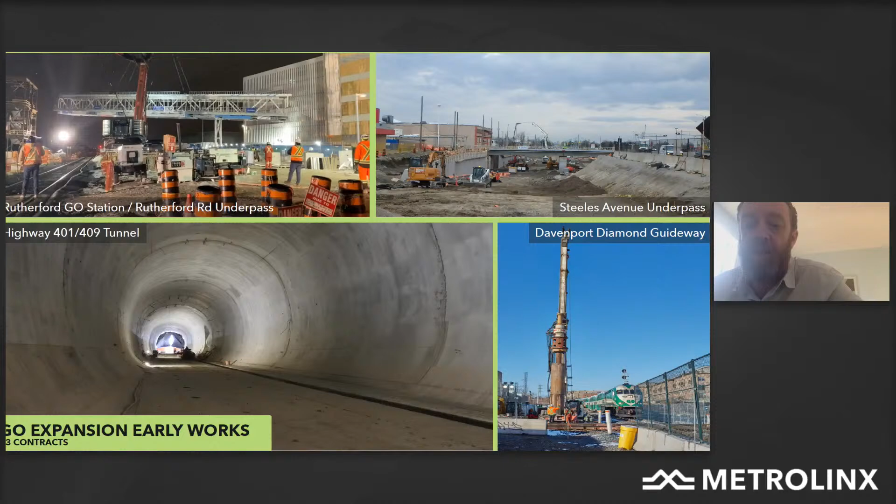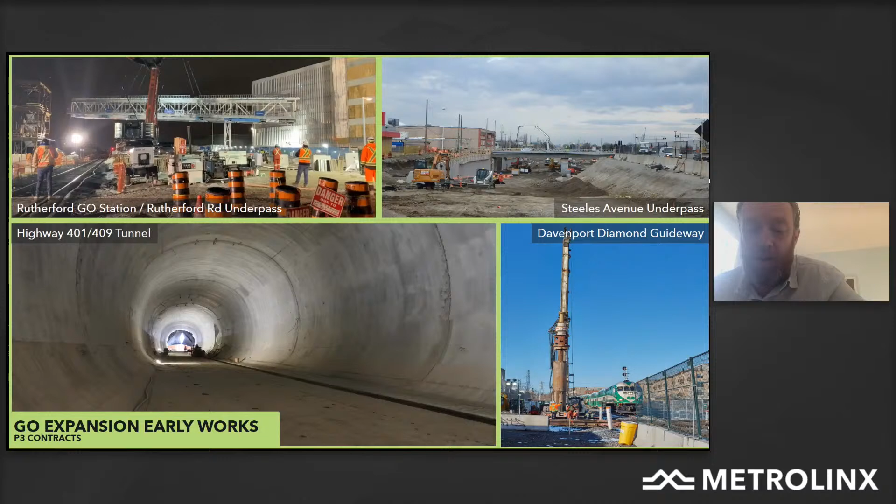Next slide shows progress on our GO expansion early work. So this is works to expand and improve the existing GO rail network. The pictures here are showing progress on our P3 contracts. In the top left, you can see a pedestrian bridge being lifted in February on the Rutherford GO station project. This project includes a grade separation, a new station building, car parking, a 6-storey multi-level parking structure, new platforms, new track, and reconstruction and reconfiguration of bus loops, parking lots, and drop-off areas.

Work's progressing very well on site, and this weekend there's a track shift which will be key to the progress of the project, under a road closure and track closure.

Top right, Steeles Avenue Underpass project, part of our Stouffville AFP. This work is to grade separate Steeles Avenue adjacent to Milliken Station. The train bridge is complete, and excavation under the bridge was complete in March this year. This is part of a larger P3 project that includes provision of a second track on the Stouffville corridor and work at Agincourt, Milliken and Unionville stations, enabling all-day two-way service on that line.

Bottom left, an incredibly exciting project as part of the P3 portfolio, the Highway 401-409 tunnel. Excavation under 21 lanes of traffic, a very complicated civil engineering project with minimal disruption allowed to the highway, and very tight monitoring in place from both ourselves and ministries and the highway agencies. Rail tunnel excavation was complete in January, tunnel lining on our first tunnel complete in March, and on our second tunnel we have waterproofing ongoing currently.

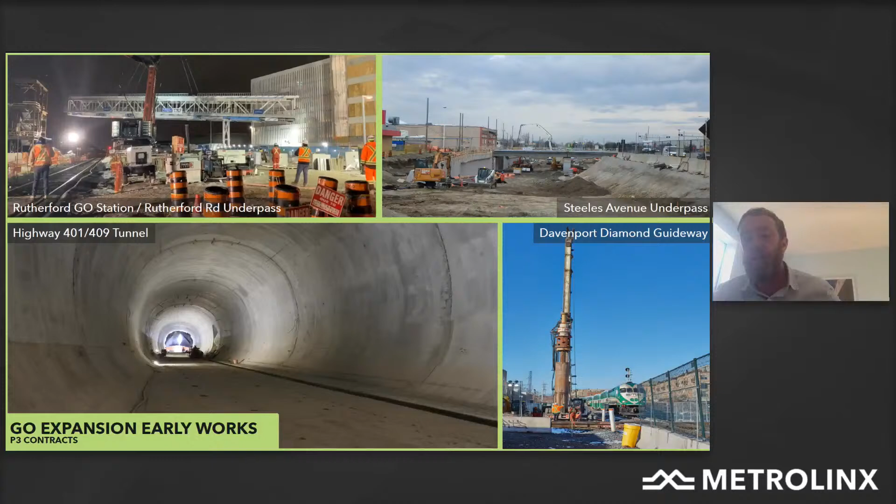Next slide. Again, on the Go Expansion side, this is more using our traditional contracts for the Go Expansion work.

In the top left, you can see a picture of our Stouffville corridor double tracking work that's been ongoing for a significant amount of time. This photograph shows work widening the track over the West Highland Creek, a very sensitive environmental piece of work, but it's progressing very well on that program now.

Top right, Bloomington Go Station, which was completed by the Capital Projects Group and handed over to operations on the 5th of March this year. It includes a new station, a new parking garage, and side platforms. A really significant piece of work for us to complete, and a real achievement for the team to have that complete in March and handed over to operations.

In the bottom left, we have Barrie Corridor expansion, enabling Project 1. This is an example of work - the picture you can see here is us installing noise walls along the Barrie Corridor. This is an example of where we've made use of the reduced ridership to really increase the volume of work we're delivering on the live rail network, pushing on very hard in the current environment of reduced ridership and reduced train traffic.

And in the bottom right, the last picture from a Go Expansion early works point of view, you can see Bramalea parking structure, a new parking garage to accommodate over 2,000 vehicles, an additional 1,300 spots, and part of a master plan on that site which has a new station building, improved facilities, new and upgraded pedestrian tunnels and accessible platforms. Works at Bramalea are significantly progressed now, as you can see from the picture of the parking garage coming together.

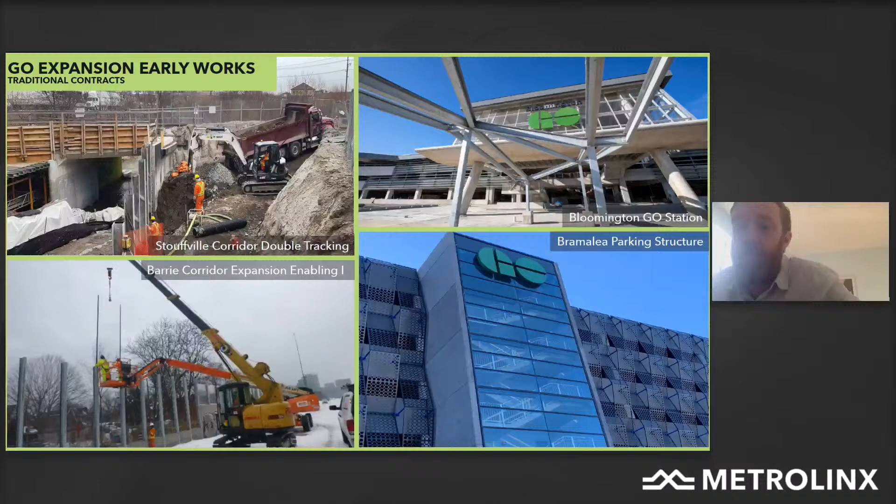And finally, subways - as Phil mentioned, next slide, on the subway space there's just a huge amount of work happening from a procurement perspective.

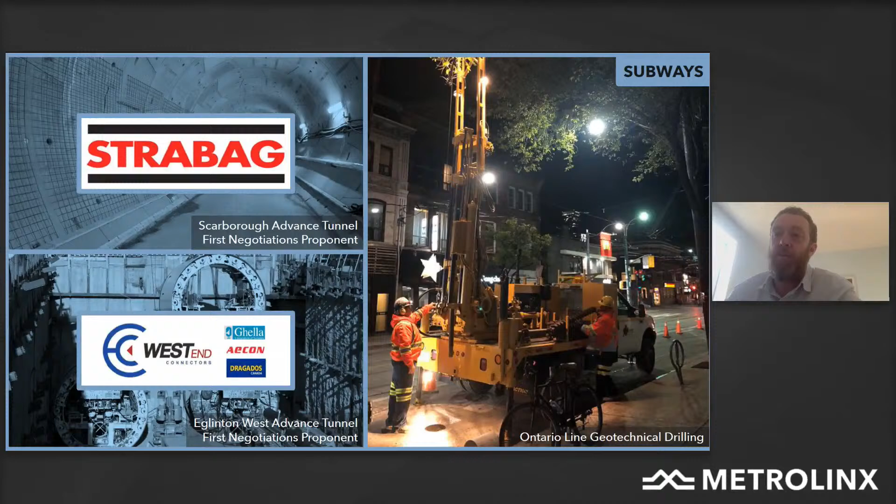So extremely exciting works. And the last picture on the slide deck is borehole work happening across the whole programme. Reliably informed, we've now carried out 700 boreholes across the programme to de-risk and understand the geotechnical conditions of the sites where we're going to be carrying out these works. So a huge amount of preparatory and investigation work is happening on the ground across the whole subway programme.

That's a very quick run through of a huge amount of work that's happening out there. Any questions anybody would like to ask Matt?

Well, Matt, it's certainly you've accomplished a lot. There's a lot more to do, but it's always exciting to see the pictures of people in action. Matt, maybe you could just give the board a sense of the Strabag taking possession of the launch site. We expect that still this week or early next week, don't we?

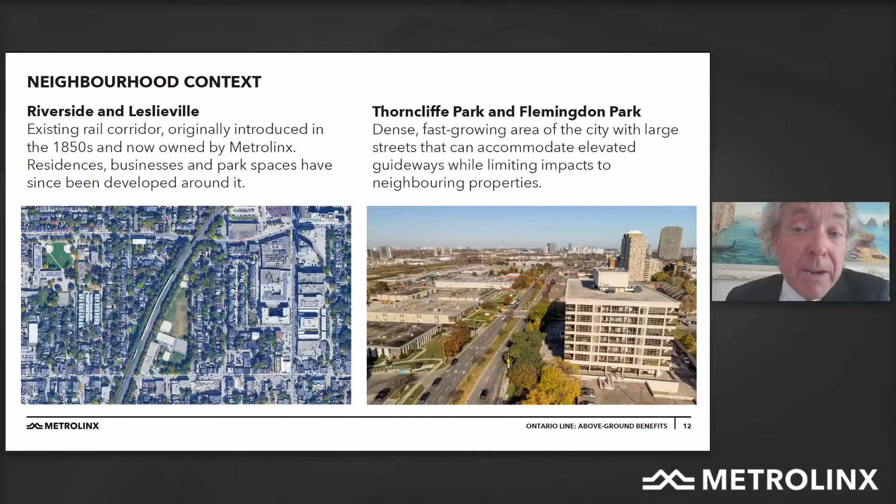Next slide. As part of our evaluation of below grade and above grade options, we use what's called a multi-criteria analysis. The depth of the station is an important and relevant consideration in terms of accessibility, connection times, and both capital and ongoing maintenance cost.

An underground alignment in these two areas would result in deep stations at Leslieville and Riverside and onwards towards Thorncliffe Park and Flemingdon Park. Given the geographic and construction constraints, an underground station in Leslieville would take approximately 4.5 minutes to connect to the surface. In Thorncliffe Park, it would be the busiest or the deepest station in Toronto and would add up to 8 minutes to any trip.

This would in fact discourage people from using transit and the Ontario Line. An easily accessed above ground alignment encourages transfers from TTC service network and GO trains and provides congestion relief, which we need across the entire network. It also avoids major utility relocations and costly high-risk construction under the Don River.

We heard a question from the community: is it safe? The Ontario Line is safe by design. It uses modern technology that will provide reliable service as frequent as 90 seconds during the busiest travel times. With customer and community safety as a top priority, Metrolinx is also partnering with the Canadian Standards Association to evaluate safety risks of the entire rail system. Along with new signaling and automatic platform edge doors, we'll be able to provide a safe, reliable service and a smooth ride to work, home, or anywhere in between.

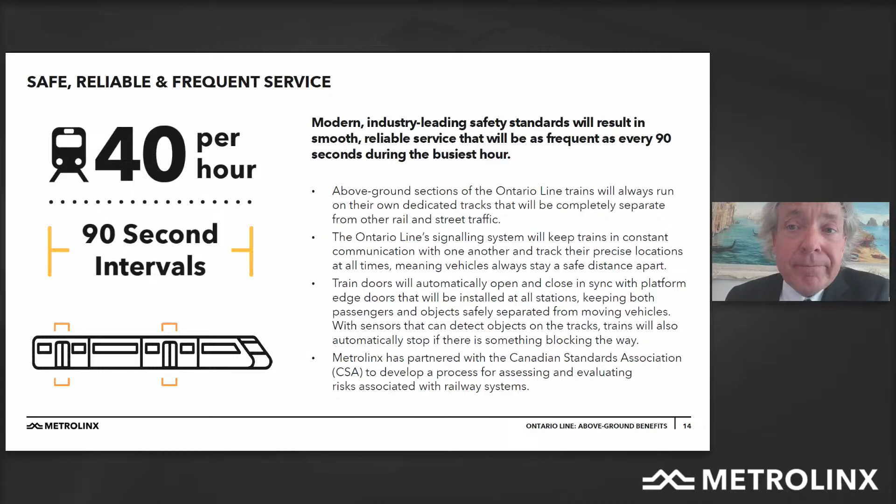As part of our multi-criteria analysis of the alignment, Metrolinx also considers the time and impact of construction activities on the community and the properties needed to support the project, both in terms of permanent and temporary takes. Underground construction is time-consuming, disruptive, and costly, especially in the confined areas through Leslieville and Riverside. Above-ground construction coordination of the Ontario Line and GO expansion will result in shorter construction timelines, reduced property impacts, and less disruption to local traffic and transit operations.

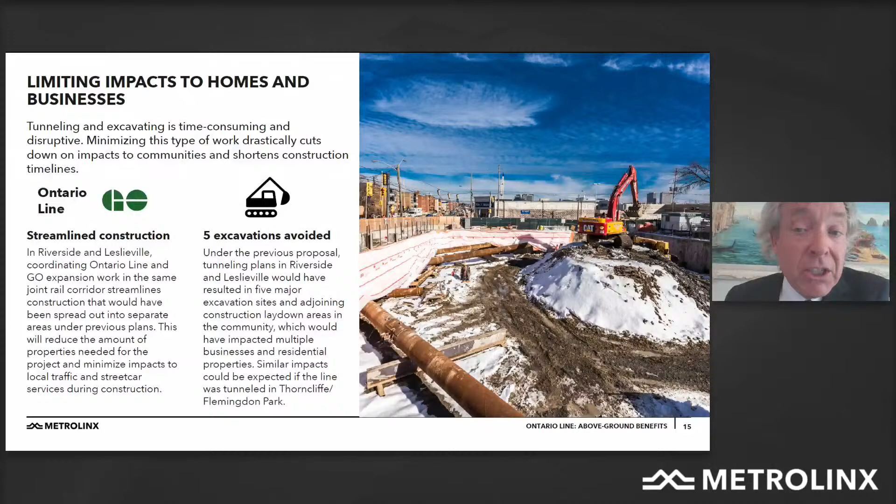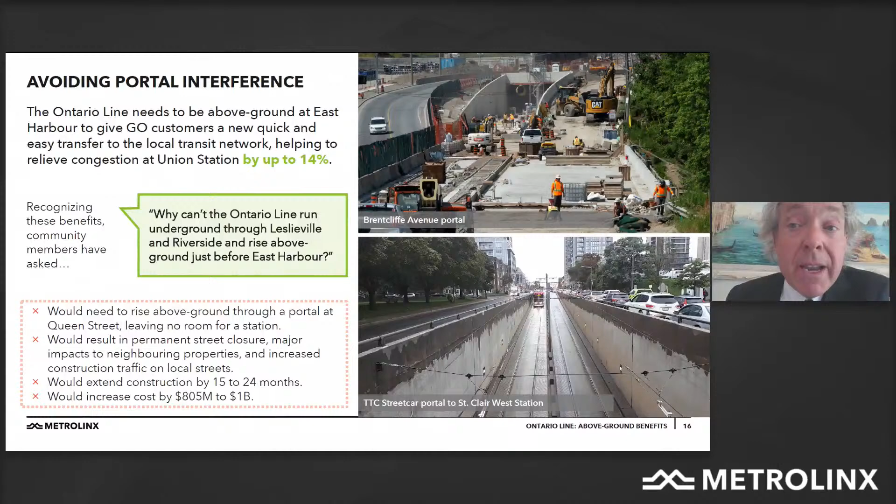The Ontario Line needs to be above ground at East Harbour to give GO customers a quick, new, easy transfer to the local transit network. As such, we investigated partial underground solutions to get below grade after East Harbour before Leslieville. Our evaluation showed that longer duration, more complex and disruptive construction would be needed to build the portals and stations. Extra property is required in an area where we're desperately trying to minimize property impacts, and the cost would increase by $805 million to $1 billion.

During our public engagement, we've heard from some communities that they were concerned about air quality, which might be worse in the above ground sections. We're pleased to report through our environmental modeling that with the use of new electric powered trains and train technology by the Ontario Line and GO Transit, we will in fact improve air quality. The Ontario Line will help curb congestion, and with an anticipated 28,000 fewer vehicles on the road each day will result in less traffic in the communities, fewer parking spaces, and 7.2 million fewer liters of gas burnt each year. That's greenhouse gas reduction. That means a healthier community.

During our public engagement in early 2020, we heard concerns from the communities adjacent to the shared corridor for GO Transit and the Ontario Line, centered on three themes: one, the potential for increased noise as a result of the above grade alignment; two, the aesthetics of the retaining walls; and three, threats to community spaces and tree loss through the corridor.

Metrolinx is committed to an above and beyond approach to mitigation of these concerns and a robust City of Toronto and community engagement in the application of mitigation tools and solutions. The Ontario Line is enabling investment in continuous noise walls to shield the community from the noises and sights of the Ontario Line, GO trains, and VIA services. We're very excited to report that preliminary noise modeling in the Leslieville Riverside communities is showing improvement, with a noticeable decrease in perceived sound of every passing train and a perceptible decrease in the average noise resulting from train operations.

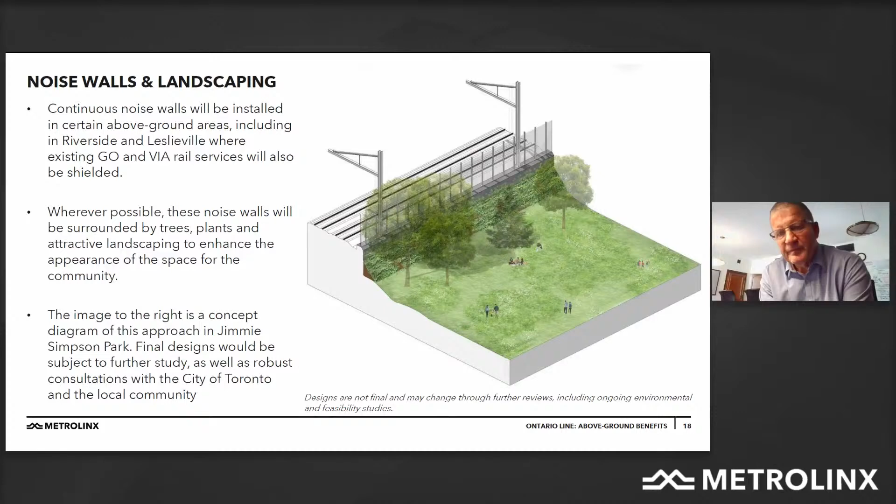I think, Malcolm, that's a big issue, isn't it? That we're going to use this as an opportunity to make that whole corridor more environmentally friendly, more noise protected, and to do it in a way which will agree with the communities, with plantings and public spaces reinstated around the corridor. So instead of dividing the community, we'll take something that runs through the community and just improve it. That's the strategy, isn't it? That's exactly right, Phil. Okay, so hopefully we're on slide 18 right now.

We're also going to be using continuously welded rails to eliminate the clickety-clack of passing trains. New automated vehicles with a really good maintenance standard will help curb noise and vibration at the source, and we're continuing to study the array of technical solutions that will improve noise and vibration.

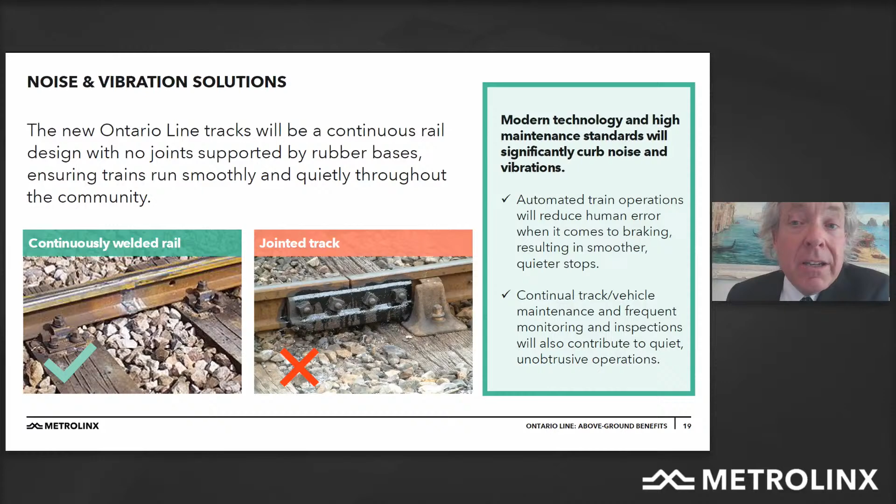Since much of the Ontario Line fits within property currently owned by Metrolinx, many mature trees in Jimmie Simpson Park, Bruce Mackey Park, McCleary Playground, Gerrard Carlaw Parkette, and Tiverton Avenue Parkette will be protected. When we do remove a tree to make way for construction, Metrolinx will work with the City of Toronto to identify new locations to plant three new trees for every one that we touch. Metrolinx is also excited to report that Jimmie Simpson Recreation Centre will be untouched by the Ontario Line construction and will continue to offer recreation programming to everyone from preschool to older kids. When the Ontario Line opens, there'll even be better access to this important community hub.

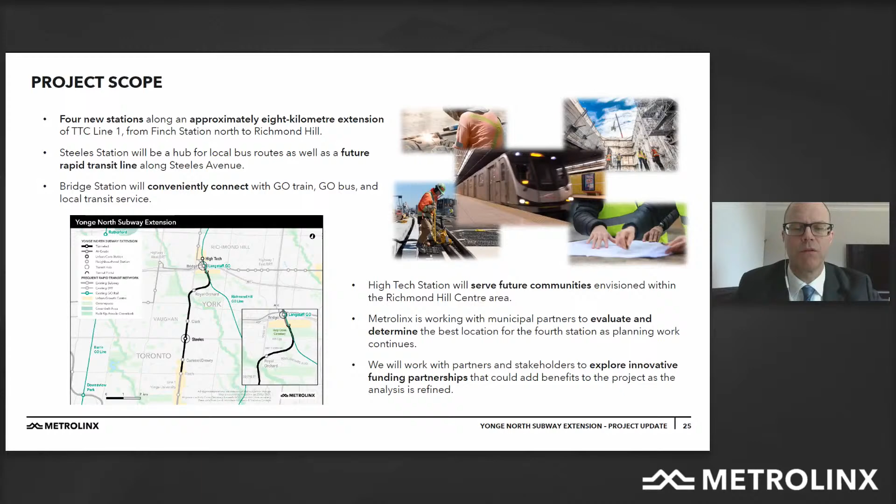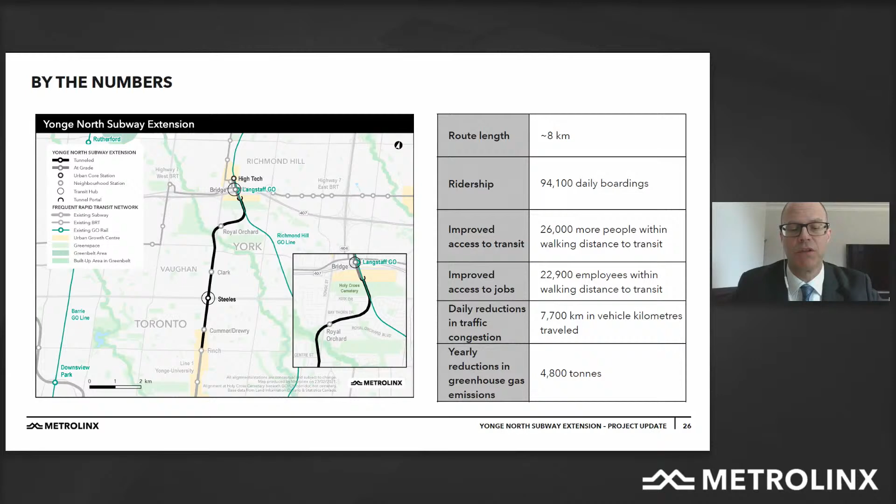Some of the key benefits and the drivers of our business case: the ridership is quite significant, and we're looking at close to 100,000 daily boardings. We're bringing tens of thousands of more people and jobs within a short 10-minute walk of the subway service. We'll be reducing greenhouse gas emissions by 4,800 tons annually and significantly reducing the vehicle kilometers traveled, helping manage congestion in this rapidly growing area of the GTA and a known concern of the residents and businesses of Southern York Region.

The demand for travel along Yonge Street corridor requires more than 3,000 buses to meet people's mobility needs. The Yonge North Subway extension will give these people a rapid transit option and save them 22 minutes each way on their trip to and from York Region. The 94,100 daily riders will share a combined 835,000 minutes of saved time from their daily travels, enabling them to put this time to higher and better use.

Our placement of Bridge Station in the northern section of the project at the centroid of the Langstaff Gateway maximizes the potential to achieve the transit-oriented community's objectives by efficiently serving the area with not only the subway, but also the integration of Viva BRT, Highway 407 bus, and the future Highway 407 transitway.

Running the subway at grade, which is our proposal to interface with the CN corridor and bring the subway to the surface, allows us to advance the project quickly and finish sooner. Building the tracks and stations at grade in the northern portion of the alignment avoids costly and complex underground construction and reduces the vertical distance that people will need to travel, enabling fast and efficient transfers between the transit services at Bridge Station and access to High-Tech Station. Using the existing rail corridor also reduces the disruptions to existing services in the area, including major utilities and major stormwater infrastructure serving the Richmond Hill Centre.

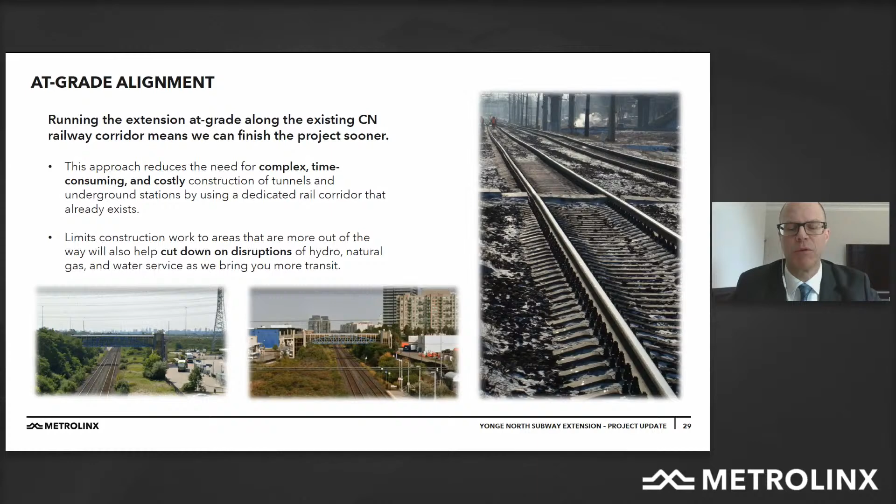Of key interest to us, and really what is special about our business case, are the couplet of Bridge and High-Tech Station. These stations are placed to serve the highest density areas and locate the major transit hubs centrally within this provincially designated urban growth center. The hub will enable fast and efficient transfers between the rapid transit and local transit services, which will converge at the single location. By using the existing rail corridor and the space between Highway 407 and Highway 7, we have optimized the use of land within the urban growth center, freeing up developable space for more productive community building uses.

Stephen, before you go on to the next slide, do you want to give the board a sense of how this is different from the original design, which entered Richmond Hill and the development sort of from the southwest more than from the southeast, and that meant less effective use of real estate in downtown Richmond Hill, and also not a great connection with the gateway development. Just talk about that mixture of issues, which we have significantly improved now.

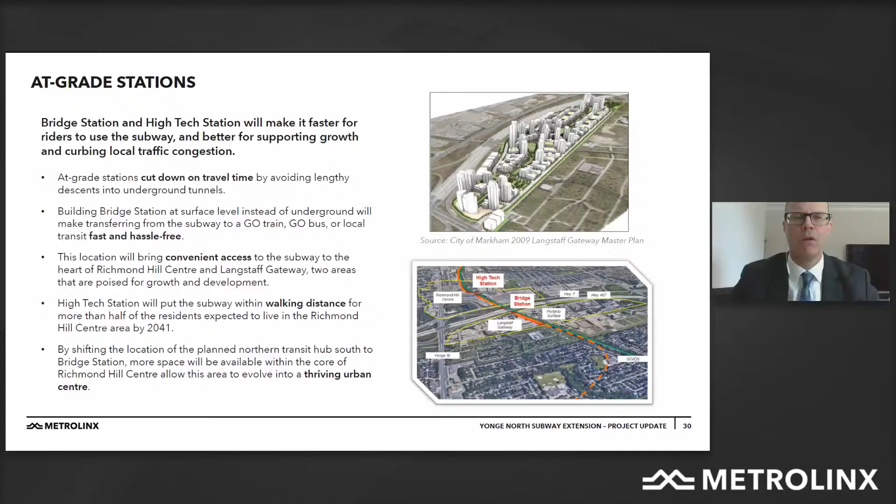I'll just speak for a minute about noise and vibration. There are many locations in North America and around the world where subways operate or are being constructed close to homes and sensitive land uses. Modern subways are designed to minimize the noise and vibrations caused by construction and operations, and as part of our work in the next phase of the Yonge North Subway Extension project, we're analyzing the latest technologies and will incorporate these into our project.

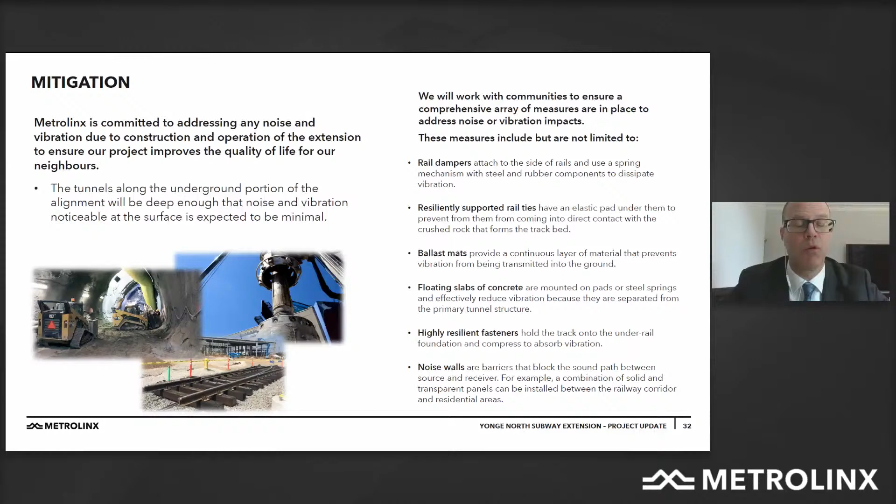More work will be done to customize the solution for the entire project, with a focus on the northern below-ground section where it travels below the Royal Orchard community, and the at-grade sections as they travel into the urban growth center. This will include significant consultation with communities and key stakeholders, so we're not only explaining what we propose to do, but also listening so we fully understand their concerns and can incorporate appropriate measures into our project.

Next slide, please. So in closing, I want to thank the board for this opportunity to share our update, and look forward to our continued work to advance this priority project for the benefit of existing and future residents and businesses. And with that, I'll turn it back to the chair and welcome any questions.

Thanks, Stephen. Any questions from the board to Stephen? Don, Paul Saparis, I have one. Go ahead. First of all, a very exciting proposal.

One of the questions - you talk about the dramatic reduction of buses down the Yonge Street line, which I think will be welcomed by all residents. I was wondering if we know what's going to happen with Finch, currently a regional hub for a lot of those buses. Clearly we won't need that regional hub anymore. Is there any thought on how that intersection or Finch Station and the land around it will evolve? And are we thinking about that from a social and economic benefits perspective in this business case?

That's a great question. The quick answer is we have not yet started working with the TTC on what the future of Finch Station and the area around it will be. We're still doing a lot of work with the TTC and the project team to understand how as many as possible of those routes that now terminate at Finch Station can be brought further north to interface with the Yonge Subway. Once we reach a conclusion on the number of routes we can bring further north and get those people on the subway earlier, we'll turn our minds to working with the TTC on the future of Finch.

These puppies ache. You've been on them all shift, but it's time to give them a break. All the way home, find your unwinding time. Find your go time. You've done it. The VPN is VPNing again. Home offices are back up and running, and that means some downtime for you. Find your unwinding time. Find your go time.

Presto contactless payment is straightforward and easy. It allows customers to pay with their credit card, mobile wallets, and in the near future, debit cards. It's important to keep in mind that contactless payment is an alternative to paying with your Presto card, not a replacement. It gives you, the customer, more choice and convenience, and eliminates the need to buy a Presto card or wait in line to get a ticket.

Take the Go, and instead of the road, your eyes can be locked on your lovey-dovey buttercup. Find your lost-in-their-eyes time, find your go time. Nobody raced for the front seat, no chair backs were kicked, no fight ensued. Perhaps all this peace is because you took Go Transit. Find your fam jam time, find your go time.